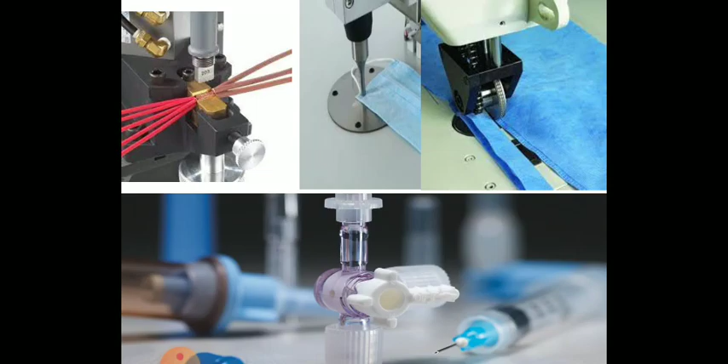So let's begin with how these particular things are utilized. Yes, one more thing which I left, that it is utilized for plastic welding, and that plastic welding basically leads to the medical sector as well. So as you can see, now from today if you see any kind of medical equipment that is jointed or assembled together, it is just because of this particular welding process.

So you can see there are numerous kinds of work that happen through this ultrasonic welding. As you can see, the second figure is also showing the joining of that particular band in the mask.

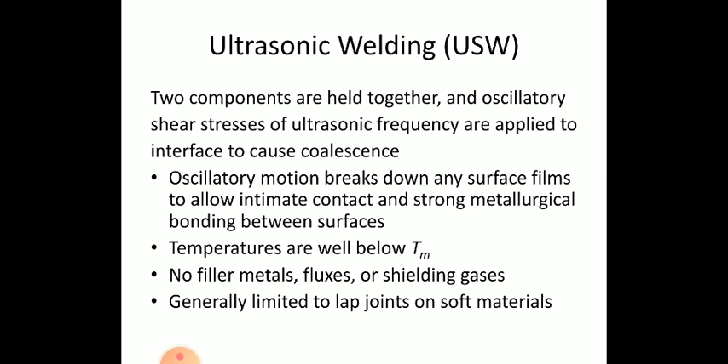And if we talk about this particular process, as you saw in the earlier slides, there are a number of components made by this ultrasonic welding. So how it works, how it joins, let's get detailed about this ultrasonic welding.

So it is basically utilized also for thermoplastic injection molded components, and it is the process that uses mechanical vibration with a kind of equipment. That equipment we will discuss, known as the sonotrode, or a kind of horn which provides vibrational energy to the component, so that due to that vibrational energy friction and heat is generated, and due to that the materials are combined with each other.

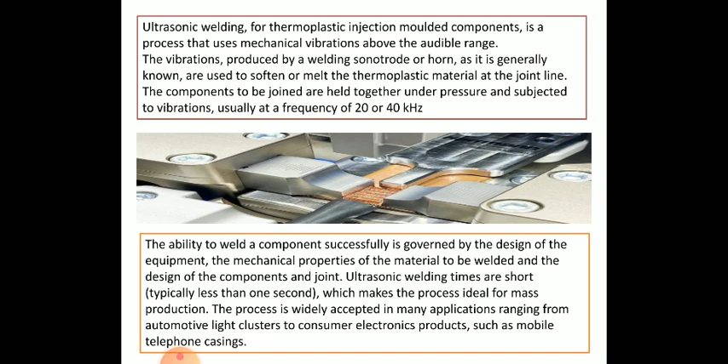So how this looks like and how it works, let's see step by step and talk about their various components, as well as their working principle, application, advantages, disadvantages, and so on. So all the details we will cover in this lecture, and let's see how far we are going for this particular lecture.

So the basic setup is in front of you, the particular equipment consisting of the machine press, the generator, the converter or transducer, the booster, sonotrode or horn, and the component supporting the basic tools. So these are the basic components that you can see in the figure, which are helpful in joining the particular components.

So a pneumatic system is arranged, and the welding press is also combined with this particular pneumatic system to combine the particular joint and provide a kind of weld. So that is the base plate, and that is the two-hand safety operation.

So let's begin with the generator component. What is the meaning of that particular work and what is the working of that generator? So the generator converts the electrical power from the single phase mains to the correct frequency and voltage for the transducer. What is the working of the transducer? As we discussed, it is a kind of converter basically, which converts that particular power into mechanical vibration.

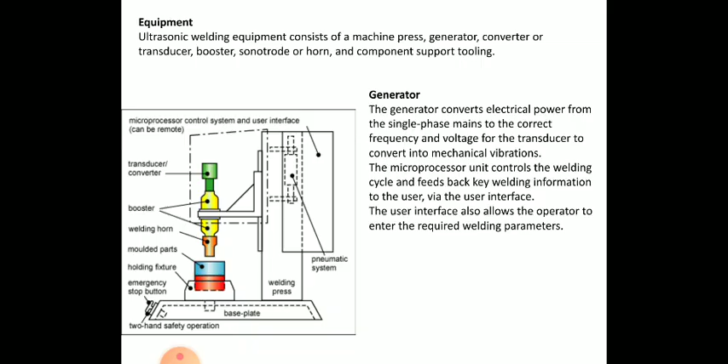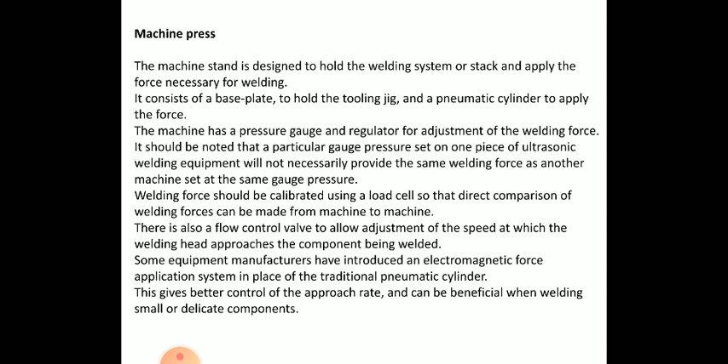Some equipment manufacturers have introduced a kind of electromagnetic force application system in place of the traditional pneumatic cylinder. This gives better control of the approach rate and can beneficially weld small delicate components as well. That is the basic concept of this.

Now looking at these ultrasonic welding techniques, the general setup for the lap joint, and the close up of the weld - you can see how the mass and the sonotrode combine together and provide the vibrational energy to join the welding materials.

In the figure you can see the plastic materials are put over the anvil, and that combines the particular materials.

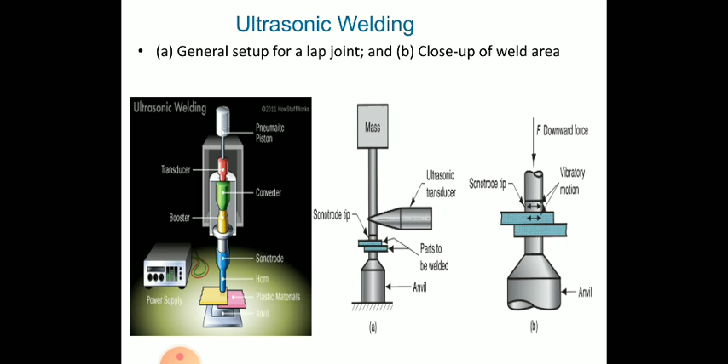These welding stacks are the part of the machine that provide the ultrasonic mechanical vibration - the welding stacks. These are the boosters.

In general, a 3-part unit consists of transducer, booster, and the welding horn mounted on the welding press at the center point of the booster section, as you saw in the figure as well.

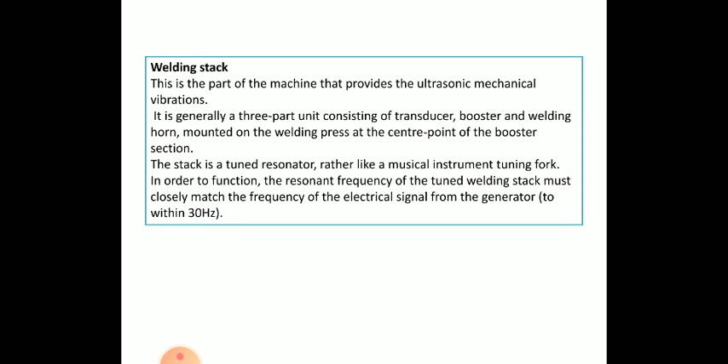So the stack is tuned to resonate, rather like a musical instrument tuning fork, in order to function. Then the resonant frequency of the tuned welding stack must closely match the frequency of the electric signal. So now what is the working of this particular booster?

The booster section of the welding stack serves two purposes, primarily to amplify the mechanical vibration produced at the tip of the transducer and transfer it to the welding horn. That is basically the work of this booster.

The secondary purpose is to provide a location for mounting the stack on the welding press. The booster expands and contracts as the transducer applies the ultrasonic energy. That is the basic detail about this particular booster.

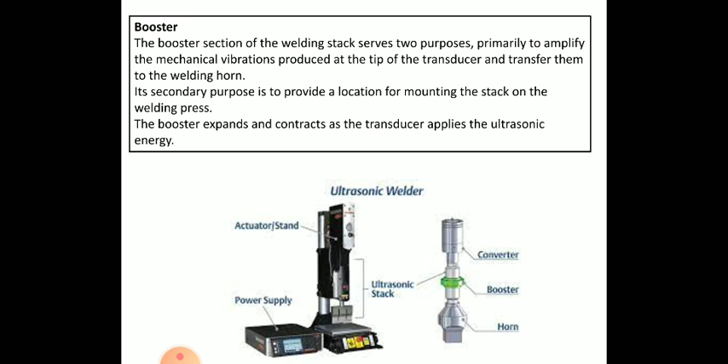Now this is the welding horn - the element that the welding stack supplies energy to the component that is to be welded, as you can see in the figure as well.

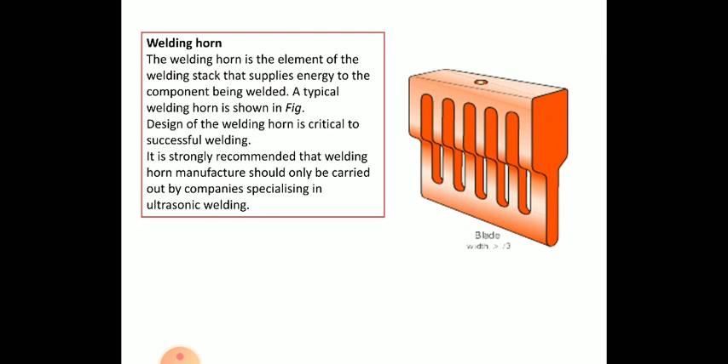The design of the welding horn is critical to successful welding, and it is strongly recommended that welding horn manufacturing should only be carried out by companies specializing in ultrasonic welding.

The welding horn, like the booster element, is a tuned device which in the majority of applications also provides mechanical gain.

This is basically an aluminum welding horn, tending to be used for low volume applications where wear can be particularly a problem with the material, and some welding horns have a special hardened tip to reduce wear during welding.

With the booster element, the length of the welding horn must be either half of the wavelength of the ultrasound in the material from which it is to be manufactured, or multiples of that length. This ensures that there is sufficient amplitude at the end of the welding horn to effect the welding.

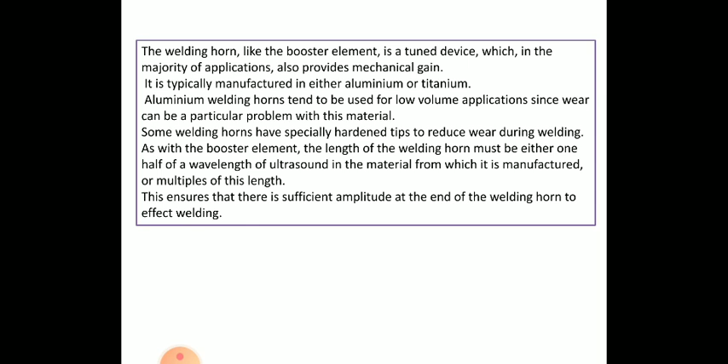That amplitude is typically between 30 to 120 micrometers, and the shape of the welding horn is important since the stress caused by axial expansion and contraction of the horn could lead to cracking in high amplitude applications.

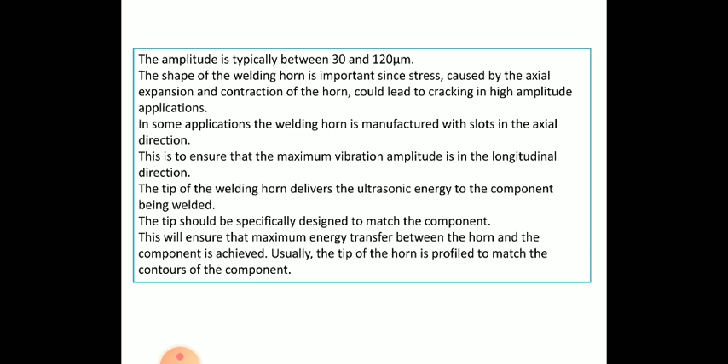The supporting tool - what is it? It is the base of the machine press that supports the tooling that supports the component during the welding operation. The support tooling is designed to prevent movement of the lower component while the ultrasound is applied. It is often machined to match the contour of the component surface.

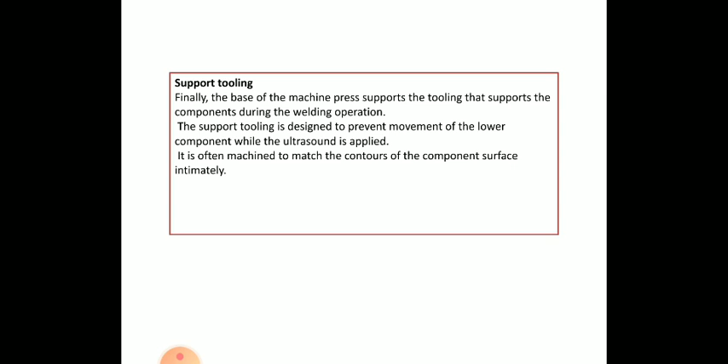Now the most important thing: the transducer, also known as the converter, which converts the electrical energy from the generator to mechanical vibration. There are a number of varieties of these transducers available, and it consists of a number of piezoelectric ceramic discs sandwiched between two metal blocks, usually titanium.

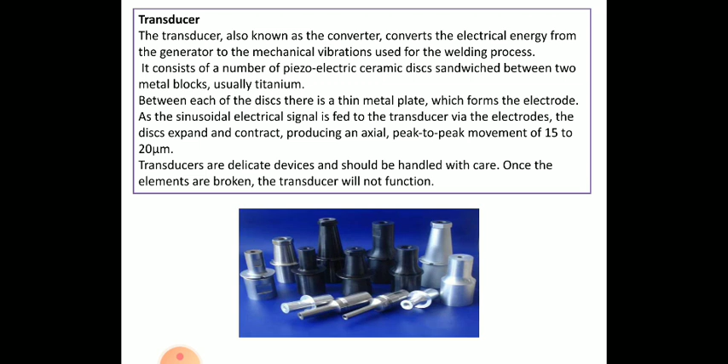Between each of the discs are thin metal plates that form an electrode, and the sinusoidal electrical signal is fed to the transducer via the electrode. The discs expand and contract, producing an axial peak-to-peak movement of 15 to 20 micrometers. The transducers are delicate devices and should be handled with care - once the elements are broken, the transducer will not function. So care needs to be taken when this transducer is working.

Now let's discuss how this process works. If we are joining two plastic pieces, we need to join or assemble them in the nest or fixture, and the horn is made to contact the upper part of the piece. Pressure is applied to the two pieces against the fixture, applied through the pneumatic or electrically driven press. The horn is then vibrated vertically at a very high frequency of 20 to 40 kilohertz.

This transmits the mechanical vibration to the plastic piece. You can see how this vertical vibration technique provides the vibration, and due to that vibration the plastic pieces are joined.

So that's the particular key about the joining technique and the application utilized for packing of components. This generates heat energy at the contact tip of the two surfaces and melts them, and clamping force is applied to the piece for a predetermined amount of time to fuse them together to form a strong weld. On cooling and solidification, the clamping force is removed and the horn is retracted. This is the very basic concept regarding the joining of the material.

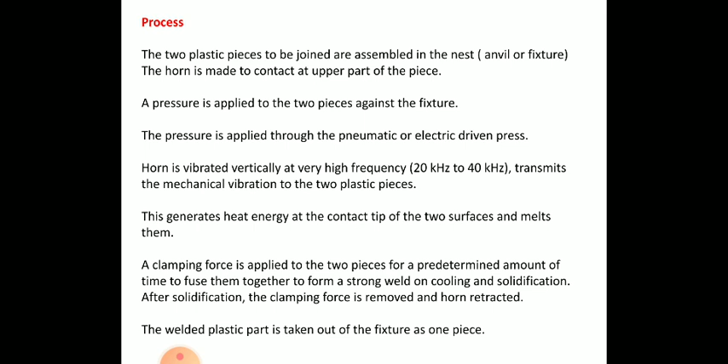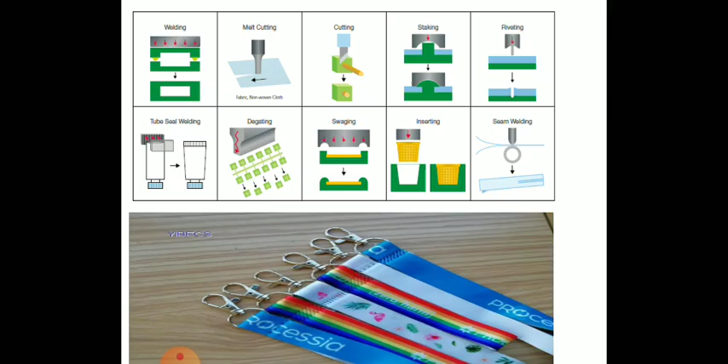Wire termination and splicing in the electrical and electronic industry eliminates the need for soldering - this process basically replaces it. That's why we are discussing this advanced technique that eliminates soldering.

The assembly of aluminum sheet metal panels utilized in the automobile sector. The welding of tube sheet solar panels - you can see how the plates of the solar panel are combined. The assembly of small parts in the automobile industry as well.

So that's the particular thing we are discussing. These are the very basic applications that we have illustrated here.

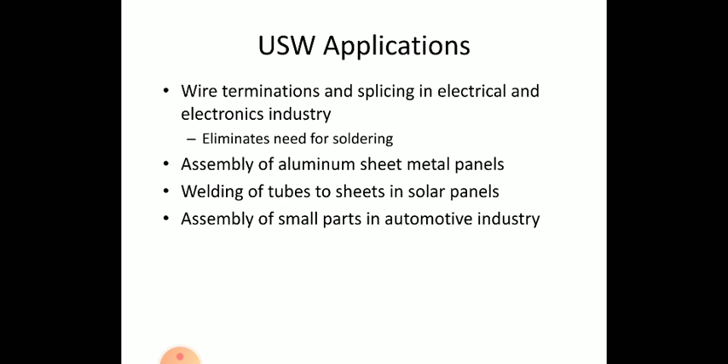There are a number of welding parameters as well, including vibrational amplitude, welding mode, down speed, trigger pressure, weld time, and hold time. These parameters must be selected correctly in order to achieve a good ultrasonic weld.

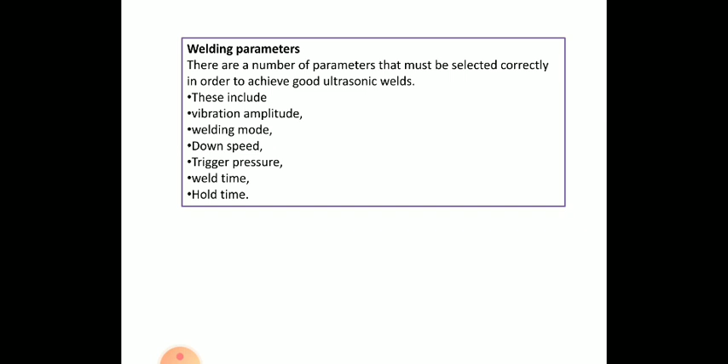If we do not maintain the parameters, it will lead to a lack of welding and the weld will not be proper. So these are the welding parameters - trigger pressure, hold time, down speed, welding mode, vibrational amplitude, and so on. So what is amplitude?

Successful welding depends on the proper amplitude of the vibration occurring at the tip of the welding horn, and for any booster horn combination the amplitude is fixed. The amplitude selection is based on the thermoplastic being welded, such that the proper degree of melting is achieved. Semi-crystalline material requires more energy, therefore more horn tip amplitude, compared to amorphous material.

The process control on a modern ultrasonic welding machine can allow the amplitude to be varied, and high amplitude may be used to initiate melting, followed by lower amplitude to control the viscosity of the molten material.

These are the welding modes: the open loop process, where the component is to be assembled. The time duration is very less, 0.2 to 1 second, and this process gives no indication of successful welding. So after completion of that time period, you can check whether the welding happened or not. It works on the assumption that a fixed weld time will result in a fixed amount of energy.

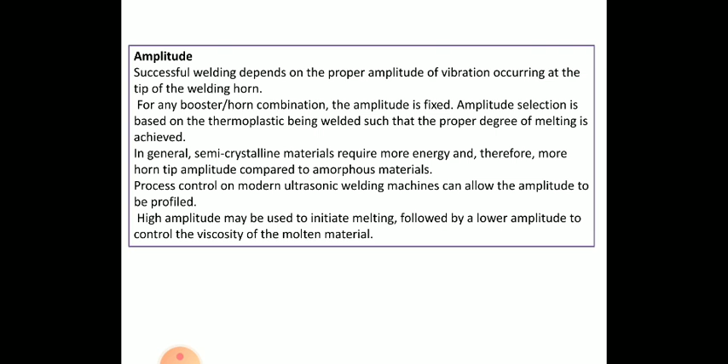Due to that factor, the fit between components means the energy is a function of power and time. Since the time is fixed, the energy applied will vary from one component to the next, and for mass production, where consistency is important, this is undesirable.

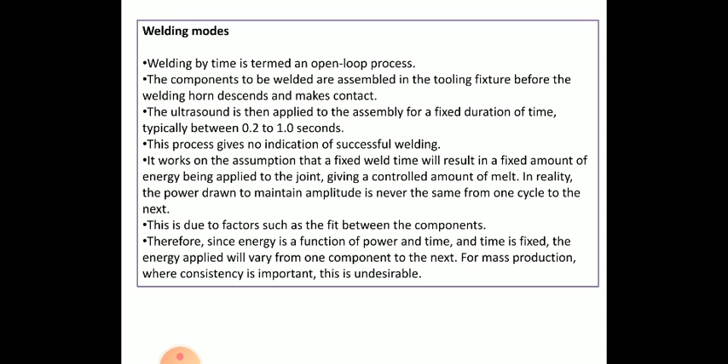So these are the basic kinds of parameters that are utilized and that need to be maintained.

The welding distance is also a parameter, specific to the depth of the components to be joined, and operates independently of the time, energy or power drawn and compensates for any tolerance variation in the molded component.

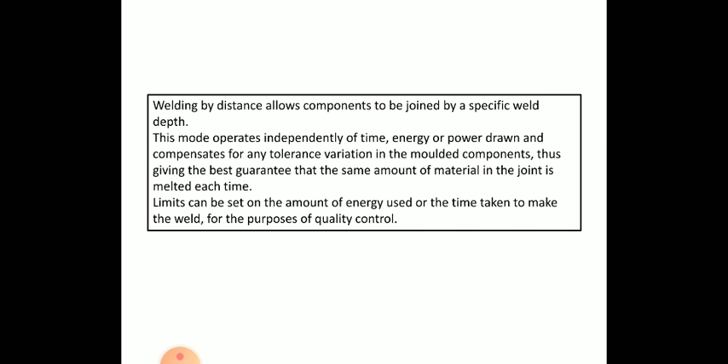So that was the parameters. Now going through the applications: the various applications are found in various industries like electrical, computer industry, automotive, aerospace, medical, and packaging. Whether two items can be ultrasonically welded is determined by their thickness.

If they are too thick, this process will not join them, and this is the main obstacle when welding of metal is to be done. If the material is too thick, it is not possible to join.

Wire, micro circuit connections, sheet metal, foils, ribbons, meshes are often joined using ultrasonic welding. Ultrasonic welding is also a very popular technique for bonding thermoplastics. It is fast and easily automated, with weld time below 1 second, and this type of welding is often used to build assemblies that are too small, too complex, or too delicate for more common welding techniques.

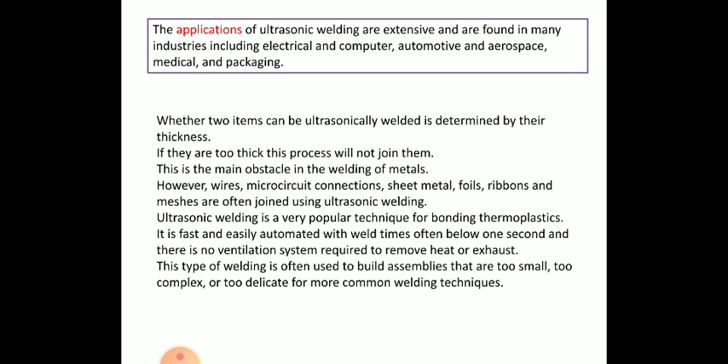Medical industries, where it does not induce any contamination. The most important thing is it does not provide any oxidation or contamination. It is free from any dust and contamination. That's why it is utilized in the medical industries as well.

Such as anesthesia filters, arterial filters, blood filters, dialysis tubes, pipettes, blood gas filters, cardiotomy reservoirs, etc. can be made using these particular techniques.

In the automobile and aerospace industry, it is also utilized for making door panels, instrument panels, air ducts, lamps, steering wheels, upholstery, engine components, and so on. This is basically utilized for joining light material like aluminum.

The packaging industry also utilizes it for different materials in food industries. It is used for packaging dangerous material like explosives, fireworks, and chemicals as well.

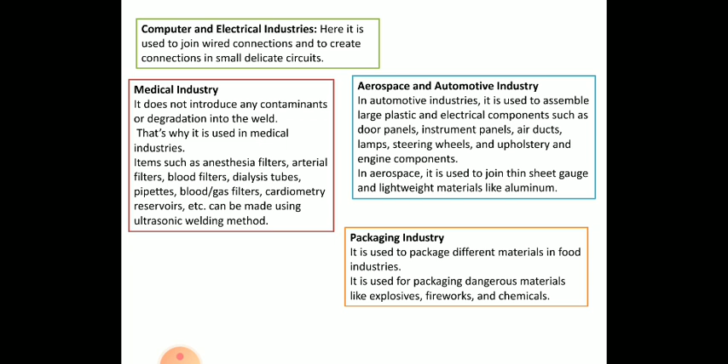So what are the advantages leading to that? It is a faster welding operation with quick drying time; pieces do not remain for a long time period. It can be easily automated. It produces a clean and precise joint. It exhibits clean weld sites and does not require any touch-up work. And it provides a low thermal impact on the material as well.

The basic disadvantage of this particular technique is it cannot be used to produce a larger joint more than 250 to 300 mm, and it requires special joint design so it can make tight contact during the welding process. Also, it requires high tooling cost for the fixture, so the ultrasonic welding process is restricted.

So these are the disadvantages and advantages of this highly precise ultrasonic welding technique that is utilized in various kinds of industries to join thin materials in a very efficient way. That's why we are discussing this.